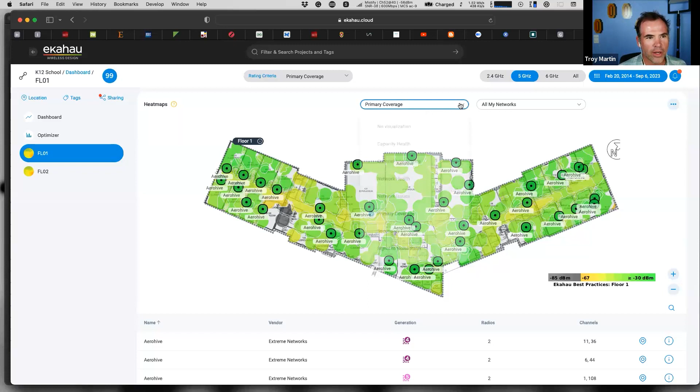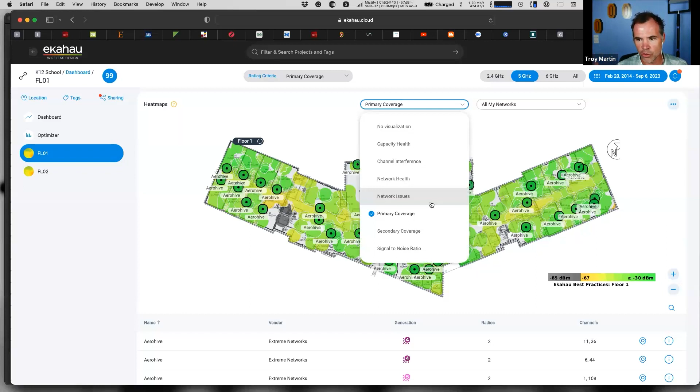Yeah, so you do have the ability within Insights to look at various heat maps, right? It's not the full set of heat maps that you'd see in AI Pro, but the ones that are highly relevant, and you can always share this with end users and customers. But what I wanted to call to attention is this Optimizer feature. So after doing a survey of an existing school, we can come in here and get some feedback into the performance of that wireless network.

So we can look at the coverage. If I click down on this, Ekahau Optimizer is letting me know that the primary coverage is in good shape. All the areas on this floor that are in scope, nearly 100% of them have coverage. I get some commentary about what good Wi-Fi best practices are, and if I did need to improve anything, some suggestions on how we can do that. And if that wasn't enough, I have links to some Ekahau blogs that dive into great detail to better understand why I want to make these optimizations in my network.

So this was an example of something that was working well. My coverage and my SNR are scored well. I have some areas where there is room for improvement. And if I scroll down here to reduce channel interference, which is one of the big challenges, and the difference between just providing coverage on a floor or optimizing and delivering a Wi-Fi network that delivers the best performance. So here I can see on 2.4, it's very, very low.

Which may be okay. Maybe I'm not designing for 2.4 gigahertz. I know all the devices coming into my networks will support 5 gigahertz. So I treat 2.4 as best effort, but I could probably do quite a bit better than 2% or 11% on each floor. But I certainly should be able to improve the 5 gigahertz channel interference.

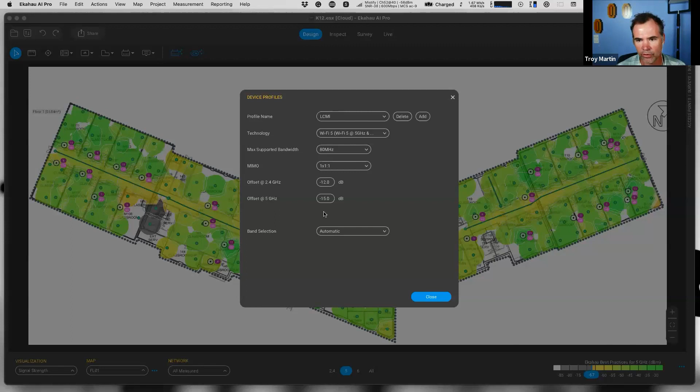And then based on the technique that Matt and Matt covered, you add your offset value, right? Which could be the same or it could be different for 2.4 and 5. In this example, because I've selected a Wi-Fi 5 device, it does not support 6 gigahertz. But if I had selected a 6E capable client, I would have the option of adding a 6 gigahertz offset as well. So once I've created this device profile offset, I can close this and I can visualize my heat map.

By default, you see the heat map for the measured device, right? Which will be our trusted and accurate Sidekick 2, collecting all the measurement data for us. There is an easy button that we can use called the View as Mobile Device button. This roughly applies a negative 10 dB offset pretty much across the board. It's the easy button, but we have no granularity with that. So if you want to apply the offset that I just created from my device profile, there's a hidden Easter egg.

Now, a little pro secret, sometimes when I'm bored, if I'm on a plane or something like that, I like opening up AI Pro and I hold down the control or the command key and I just click on different buttons and I see what changes. There's a lot of hidden Easter eggs inside AI Pro. And one of them, if I hold down the command key on Mac or the control key on Windows, and then I click on these 3 dots in the bottom right-hand corner, if I actually click on the right button,

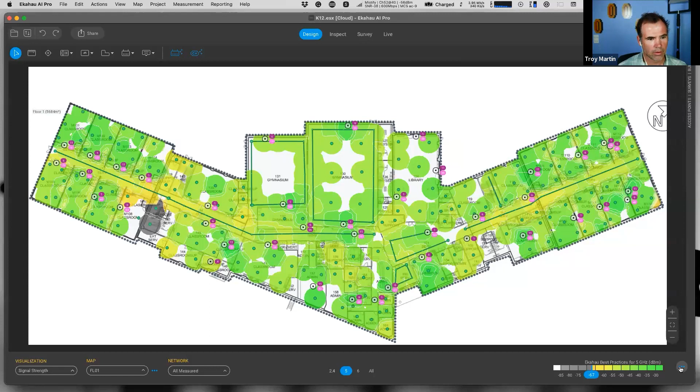Are you hitting the command button, Troy? Yeah.

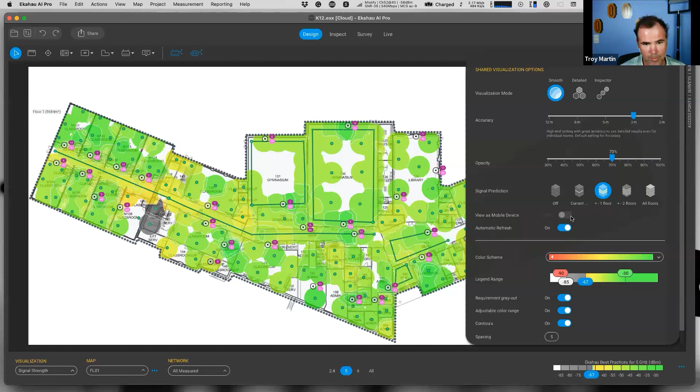Always the case with live demos. Sticky, huh? You've got a sticky key, I think. Apparently. Is it? This is so hard. Try holding the option key. Yeah, do you have a Windows machine, Troy? No, it is a Mac. That is interesting. Try reopening the file again. Yeah, give that a go.

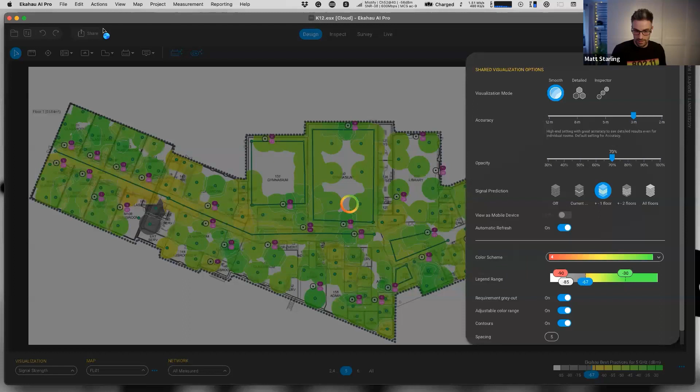All right, so I have downloaded this from the cloud, so I'll try to open it again from the cloud. And we'll open K12, open from the cloud. So it'll just take a few moments here to download it from the cloud. And there's other things. Just another secret: if you click on the wall drawing icon, there's a little settings button across the top. If you click on settings while you're holding down the command key or the control key, you should also see some hidden Easter eggs, right? So this time it's working.

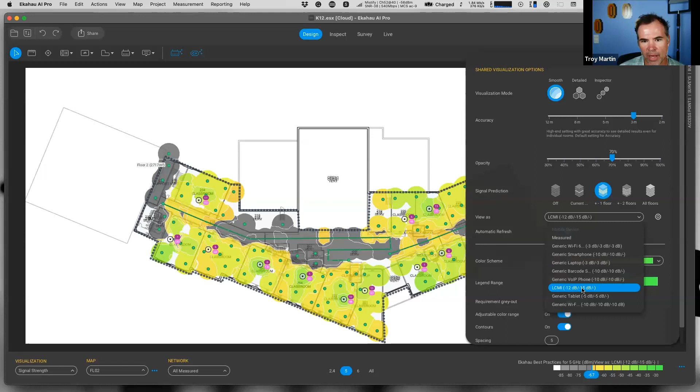Now that I've reopened it, if I hold down the command key, instead of seeing view as mobile, I get a list of all of my device profiles that exist within the project that I can toggle through, and I can choose my LCMI device that I've created, right? And so when I apply that, the heat map that I see has that 15 dB offset on 5 gigahertz. And if I flip to 2.4, it would display a 12 dB offset on the 2.4 band.

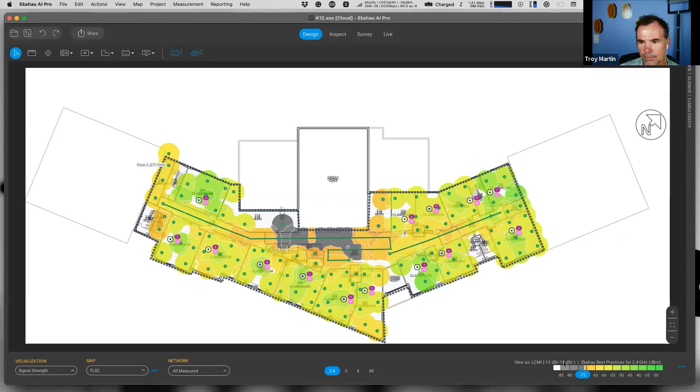And down here on my legend, I get a little reminder that I'm viewing the heat map from that device's perspective, right? So I know what I'm looking at. I don't get confused looking at the wrong thing. Awesome. Thank you very much, Troy. I will steal the share back again so I can hand it back over to Mac, who's going to talk to us about some of the common challenges with Wi-Fi in education.

Where to start? So as you know, the education sector is probably one of the most complicated and most difficult, because people will complain and it never works, because you can't predict the devices that are in your network. But if that's not enough of an issue, look at this. Building architecture can be a problem. Universities are getting crazy. My university was all concrete, for example. The previous one was all glass and concrete and a weird shape.

This one is a listed building, so it will have 1 meter or 1.5 meter thick walls where nothing goes through. Maybe it's good if you get to the class and you have an access point in the class, but how about roaming? How do you tackle that? You leave the class, you close the massive thick wooden doors behind you, and then you drop off from Wi-Fi.

Or this one here, this building must be like 1,000 years old. Who knows how thick the walls are? And if they are super thick, then it's very challenging to get fast roaming. If roaming is not a requirement, that's easy peasy lemon squeezy. But if it is, then it requires know-how about how to design for these kinds of environments. So yeah, it's never too simple with education.

Nope. And for sure, when you've got these types of environments, make sure that when you're doing your predictive modeling you get it as accurate as possible. So you can see here, we've got some common wall type materials that you can use for your Ekahau AI Pro design files. But it's really important to make sure you get these accurate.

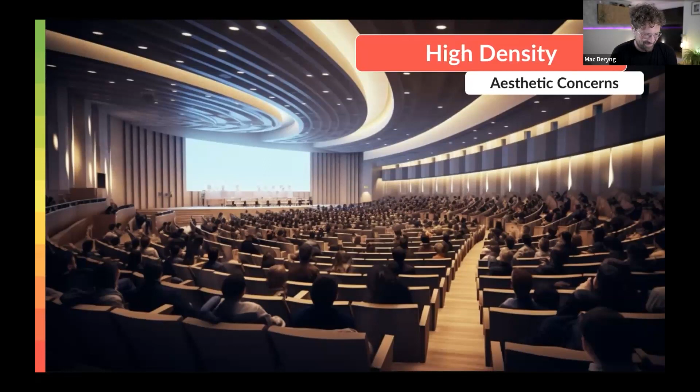Yeah, so the exam environment is rather challenging. A lot of schools that I've seen temporarily augment their auditoriums or gymnasiums, wherever students are writing the exams, and they'll add additional access points. It's a very different scenario when at 9 o'clock in the morning, when the clock strikes 9, they all hit the go button and access the wireless network. It's not staggered access or bursty applications. It's everyone going at the same time. And you certainly don't want the scenario where the Wi-Fi network crashes while you have hundreds or 1,000 students writing the exam all at the same time.

And then with lecture halls, you have a lot of different options on how you can orientate and position the access points. Depending on when the lecture hall was made, it may be relatively easy to mount access points underneath the seats and run the cabling there. For older buildings that are poured with tons of concrete, it's very difficult to run cabling through there, and it's not cost effective to drill through all that concrete, right?

So not only are you trying to create a design that propagates RF energy in ideal directions, you also need to appreciate the realities of business, right? There is a cost to where you place every access point. So your design should consider that. What's the most cost-effective design that still meets all of your Wi-Fi design requirements? And those are considerations that you need to look at when you're designing for these high-density lecture hall or theater type environments.

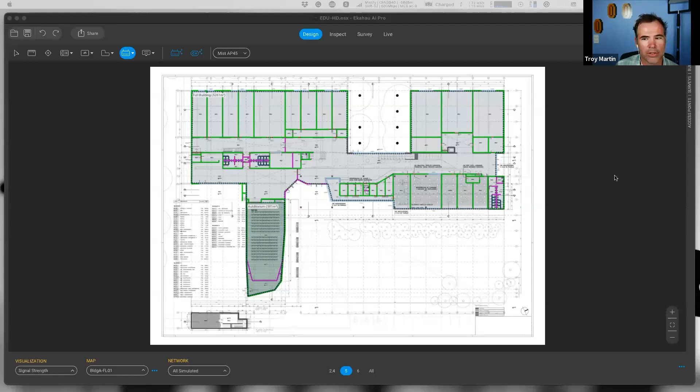So now I'm feeling a little nervous with my demos. I feel like I'm 0 for 2, so hopefully this one goes a little bit smoother.

What I wanted to show off here is a high density design with a few different options to talk through the scenario that client devices would experience. So we have a bunch of different typical classroom sized areas, and then we have this large auditorium, right? And what we can do is select an AP, and for this example, I'm going to grab the Mist AP45 with integrated antennas.

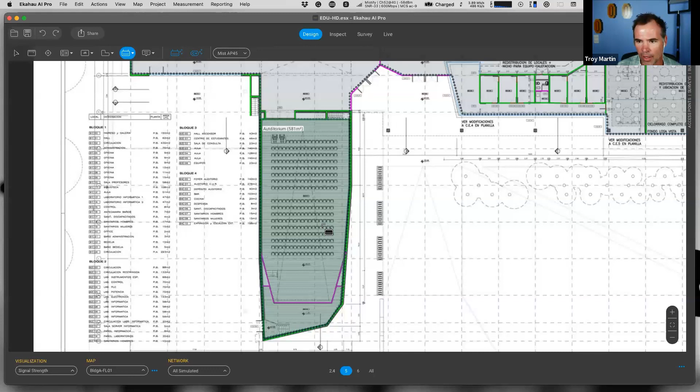And if I just drop one of these access points into this auditorium, very quickly we can see in the heat map, one AP covers the entire auditorium, right? So we have roughly 300 seats. If the auditorium was filled with students, all paying their tuition bills, the campus would be quite happy. But one AP won't provide enough bandwidth for all the students if we have 300 students in there.

But in these open space auditoriums, you want to be mindful that APs with integrated antennas cover the entire environment. And Apple has shared some of their roaming behavior details with us. And one of the parameters that Apple devices look at, particularly iOS devices, is they will not start scanning to look for another access point until they hit a -70 threshold.

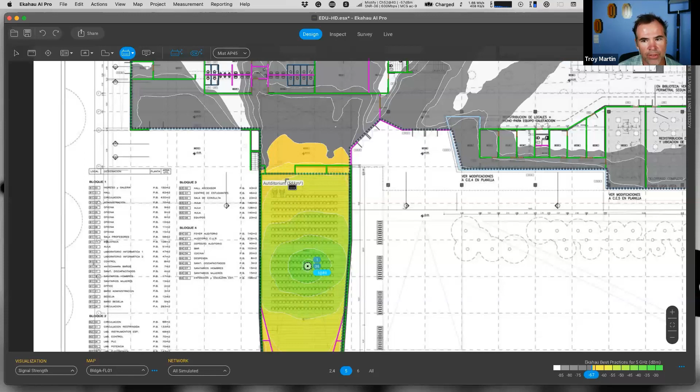So if I walk into this auditorium and in between classroom changes, you start to get a collection of students that waits in the lobby area outside the classroom. If they had another access point up in this area here, they'd all be connected to it. When they walk into that classroom, if they don't hit an RSSI boundary, they may not even roam to the AP in the auditorium. If they do roam to the AP in the auditorium, there's a good chance they remain sticky to that access point.

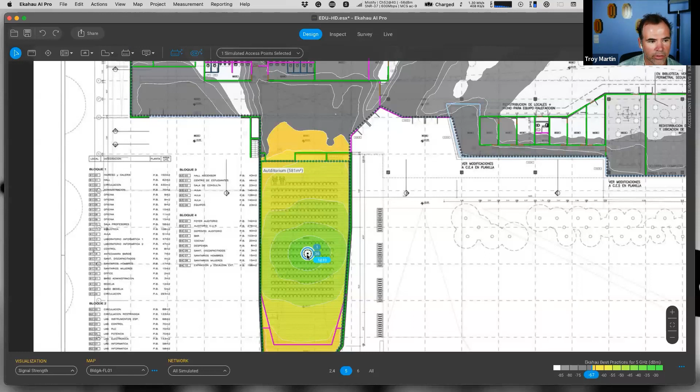And if you added more APs to add capacity for your network, you may not get the benefit of clients roaming to other APs because of the inherent roaming behavior of your client devices. They prefer to connect to one AP. Client devices often view roaming as a risky behavior, right? Which can induce stickiness, right? But if we were able to control some of these access points and how they roamed and behaved, right?

If I delete that AP, if I was able to swap out this AP, and let's grab a Mist AP45E. I think I can see one there. Oh, there you go. So here, just with my filtering, I can filter out different access points. I can choose a list of only the APs that match AP45E, and I could grab this access point here. So it's a little bit lower gain.

I grab this access point, and I may decide to put access points along the ceiling in the center, right? So this gives me 3 access points. And if everything was perfectly average, I have about 100 clients connecting to a 5 gig radio. But because this AP supports 6 gigahertz, and you can use external antennas in some countries where that is allowed, especially with the AP45E and their antenna combinations, I could mount this on the ceiling and have it directed down towards the ground,

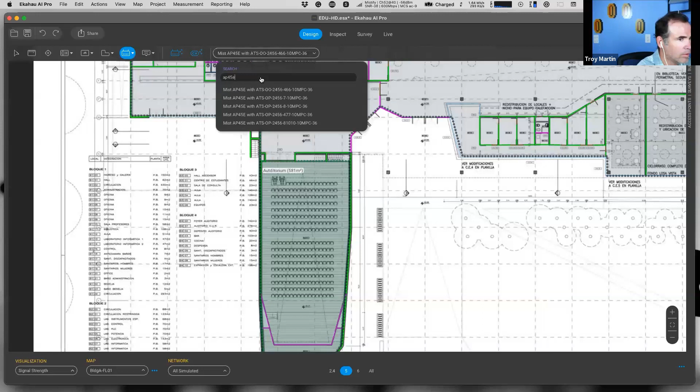right? Or I could highlight all these access points and quickly delete them. Delete these access points. I could choose another access point, right, with higher gain antennas, and I could mount it along the walls. Just go to none for a moment. Right. And then the really cool thing with Ekahau is we can click on these access points themselves and we can edit this access point. And by default, it wants to place it on the wall, but I could adjust it to be a ceiling mounted access point if I wanted.

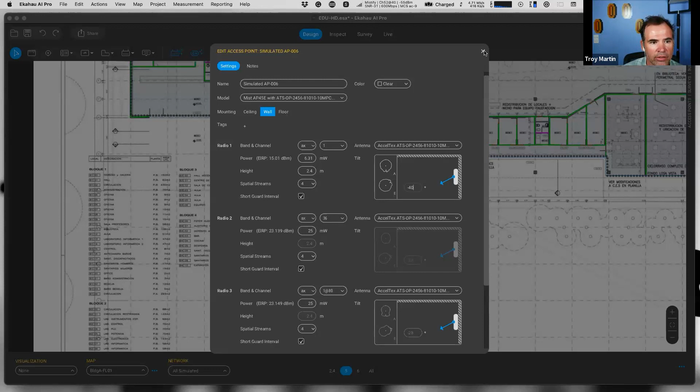But I can give it some down tilt just by clicking and sliding on this arrow, or I could type in the tilt that I wanted, right? So I may want to be very aggressive and add -40 down tilt to this access point. And I can also align the antennas to point in towards the room, right? So I can have them pointing to where students are sitting in the seats, and I could adjust each of these access points. I can adjust them individually, or I could highlight groups of access points and adjust the antenna orientation in bulk.

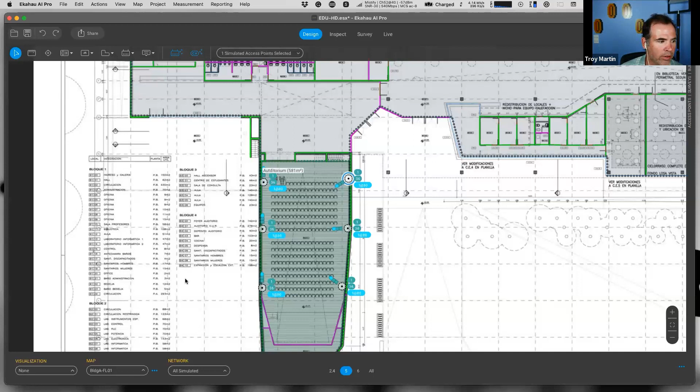All right, so both rotating it around the room or adjusting the down tilt or up tilt of the antennas as required, ultimately giving the coverage that I'm looking for and adding the capacity that I'm desiring in this room, so that I can provide the limited number of clients per radio, such that I have sufficient bandwidth to handle what the expectations are in this room. And the smaller the cell I create, the greater opportunity I'll have for clients to roam naturally on their own.

If I create really small cells, as they walk towards the front of the classroom for those keen students, they'll naturally hit that -70 threshold, start scanning for another AP to roam to, and then reconnect to an AP closer to the front of the room. So I can leverage natural roaming behavior of my clients if I position the APs in the correct locations and set the size of their cells, knowing the roaming behavior of my most important LCMI type clients in my environment.

Troy, that was a fantastic demo.